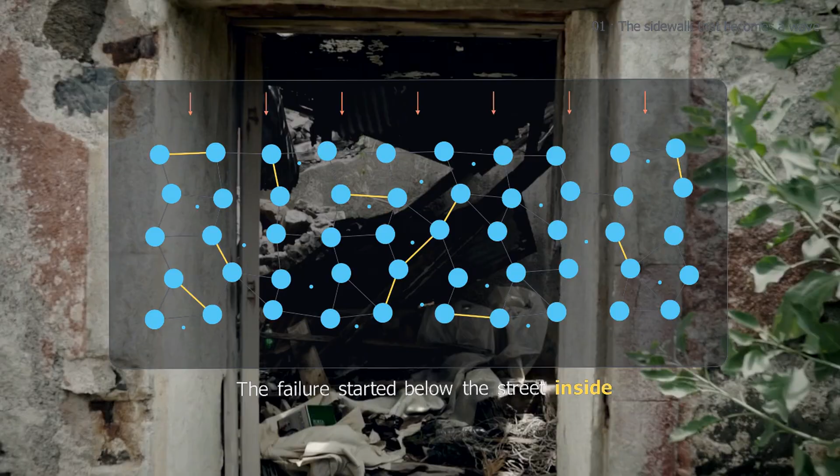The failure started below the street, in a space too small to see. Every grain of sand was carrying part of the city through a web of contacts. Then the earthquake made that web loosen, while trapped water took more and more of the load. The surface only revealed the transfer after it was already underway.

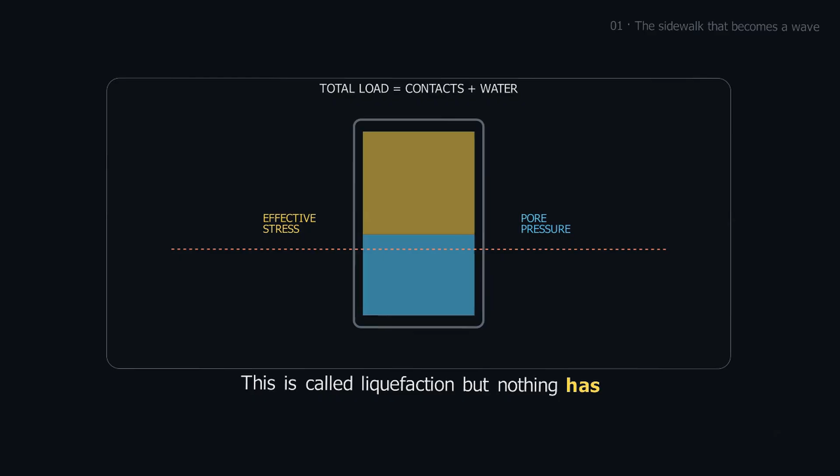This is called liquefaction, but nothing has melted. The grains remain solid. The water remains water. What changes is the structure that lets a pile of grains resist shear.

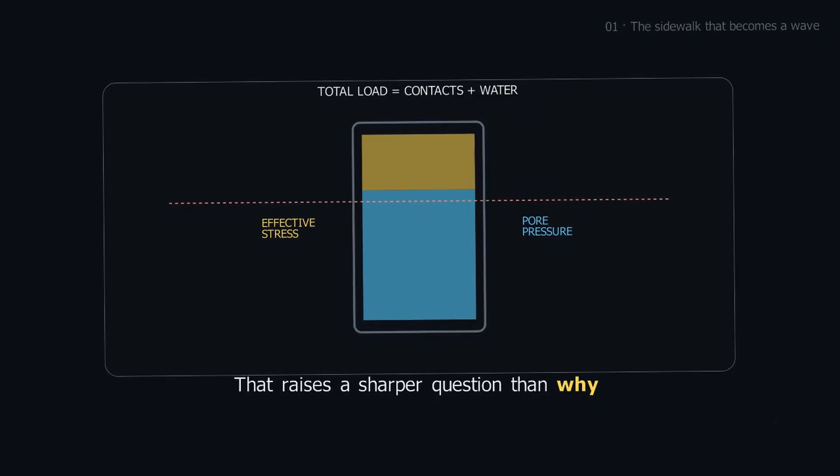For a short interval, a material that held buildings like a solid can deform with the ease of a dense fluid. That raises a sharper question than why did the ground shake? Most ground shakes during an earthquake without turning into this. Why do some blocks settle, crack and slide while nearby ground remains firm?

The answer is not one magic earthquake magnitude. It is a match between sediment, water, drainage, and repeated strain. We are going to build that match from the grain scale upward. We will watch the hidden pressure climb, cross the threshold where contact forces collapse, and then fan out into sand boils, tilted buildings, broken pipes, and lateral spreading.

The damage looks chaotic. The mechanism has a sequence. Once that sequence is visible, filled lagoons, old channels, deltas, and reclaimed shorelines become stored arrangements of grains and water.

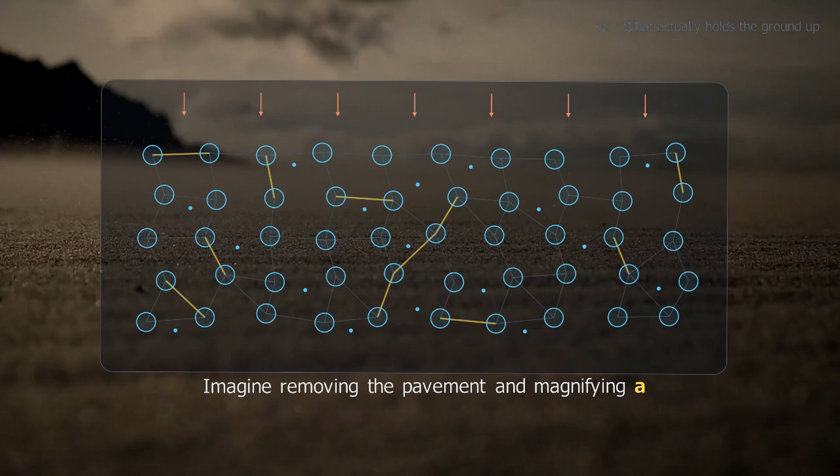Imagine removing the pavement and magnifying a small block of soil. It is not a continuous slab. It is a crowd of grains touching at points and edges. The weight above passes through branching chains of contact, grain into grain, down through the layer, and eventually into stronger material below. Between those grains are voids.

If the water table is low, some voids contain air. Below the water table, the voids can be filled with water. That water already has pressure, but under ordinary conditions the mineral skeleton still carries enough of the total load for the soil to resist distortion.

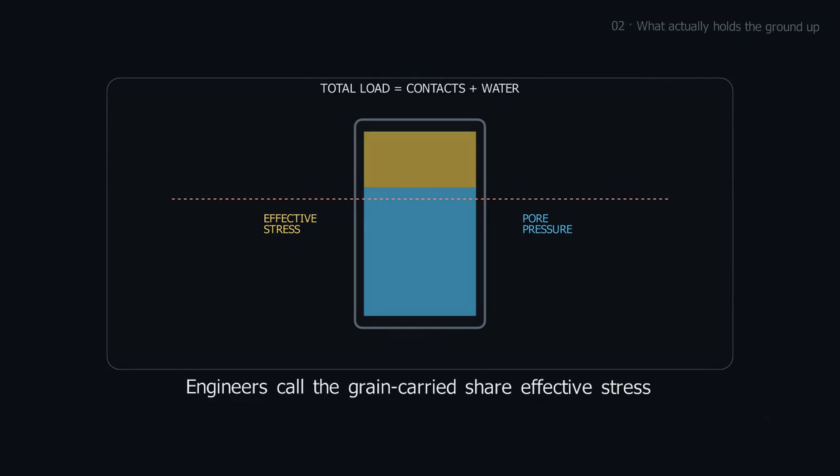Engineers call the grain-carried share effective stress. Total stress comes from everything above. Subtract pore water pressure, and the remainder presses grain contacts together and controls much of the soil's strength.

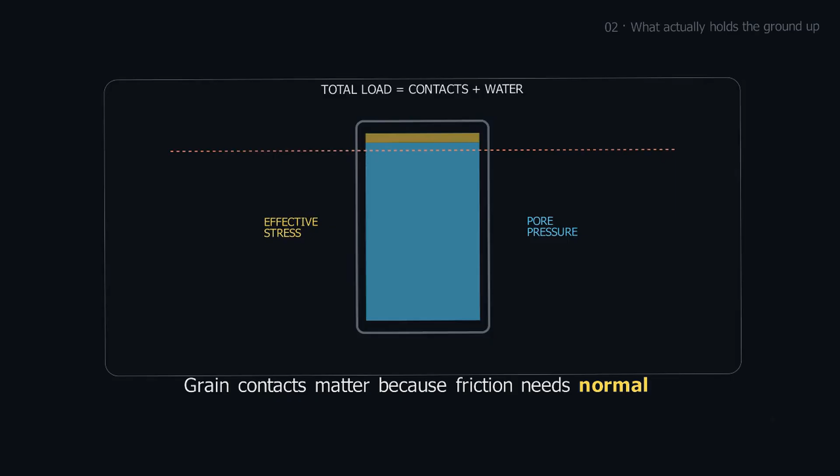Grain contacts matter because friction needs normal force. Push two rough surfaces together, and they resist sliding. Reduce the force squeezing them, and the same surfaces slip more easily. A sand layer can therefore lose shear resistance without crushing grains or heating them. It only needs the contact forces to shrink far enough.

Uneven force chains bridge loads around voids. Repeated rearrangement changes those chains, and trapped water inherits more of their load.

So solid ground is not a substance label. It is a working arrangement: grains locked by contact force, pores holding fluid, and drainage controlling how quickly pressure can escape. Earthquake shaking attacks the arrangement, not the chemistry. Liquefaction begins when the load path moves away from the grain skeleton and into the pore water.

The first screen has three parts: susceptible loose sediment, connected water-filled pores, and cyclic loading strong and long enough to build excess pressure. Remove one part and the response changes.

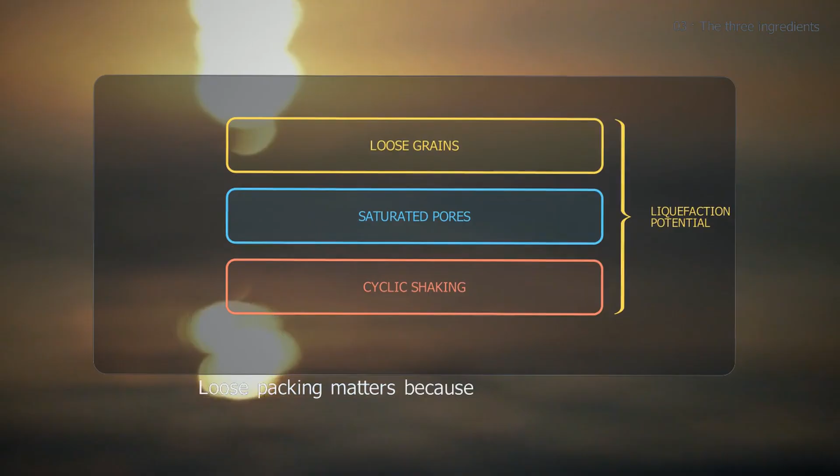Loose packing matters because loose grains have room to find a denser arrangement. Shake a dry jar of sand, and the surface settles as grains fit together more efficiently. Underground, saturated sand tries to do something similar during repeated shear. The difference is that the pore water may not have time to move out of the shrinking void space.

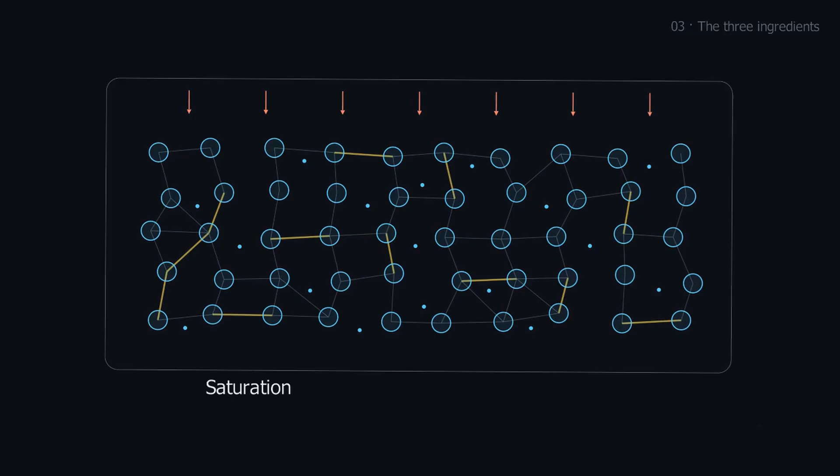Saturation supplies the pressure pathway. In dry sand, air compresses and escapes relatively easily. Water is far less compressible.

If a saturated layer is capped by lower permeability material, or if drainage paths are simply too long for the shaking interval, the attempted volume change is converted into a rapid rise in pore water pressure.

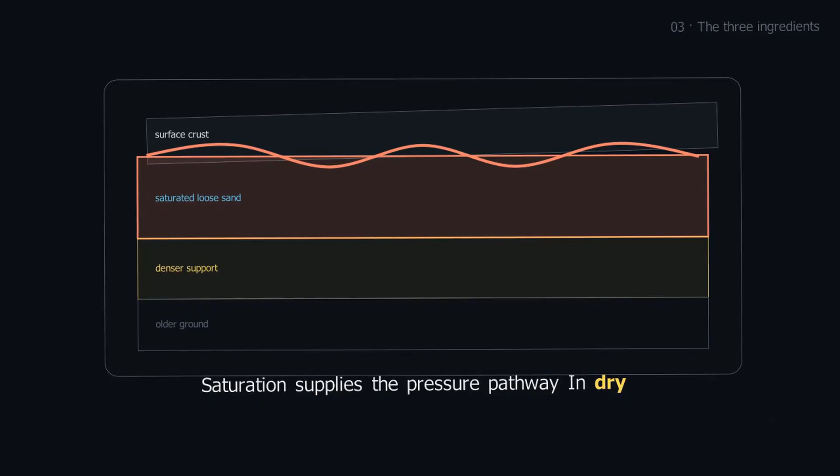Shaking supplies repeated shear cycles. One reversal nudges the fabric. The next reversal nudges it again.

Stronger motion increases the cyclic stress, while longer motion can add more damaging cycles. That is why earthquake magnitude, distance, local wave amplification, and duration all matter, but none works as a single on-off switch by itself.

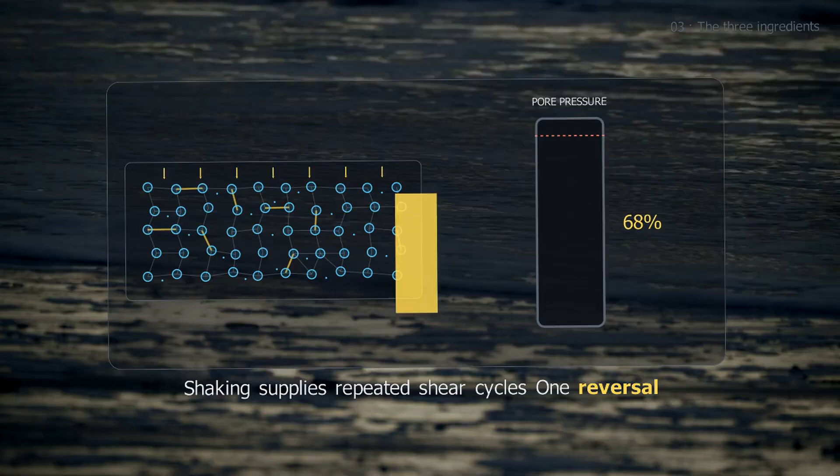Young river deposits, deltas, beaches, floodplains, and fills often combine loose sediment with shallow groundwater. Rock and clay-rich ground are different systems. This is why hazard follows buried geography.

A modern street grid can cross an old tidal inlet without showing it. Houses may sit on fill placed over a former marsh.

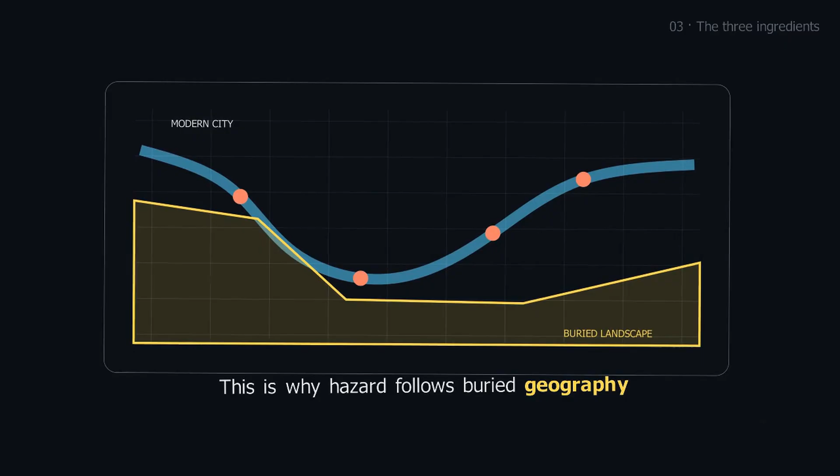Two neighborhoods equally distant from a fault can have very different liquefaction susceptibility because one is founded on dense natural ground and the other on loose saturated fill.

Start the shaking. The soil layer shears one way, then the other. Grains roll, slide, and try to reorganize. In a loose packing, their preferred rearrangement is contractive. The skeleton wants to occupy slightly less volume.

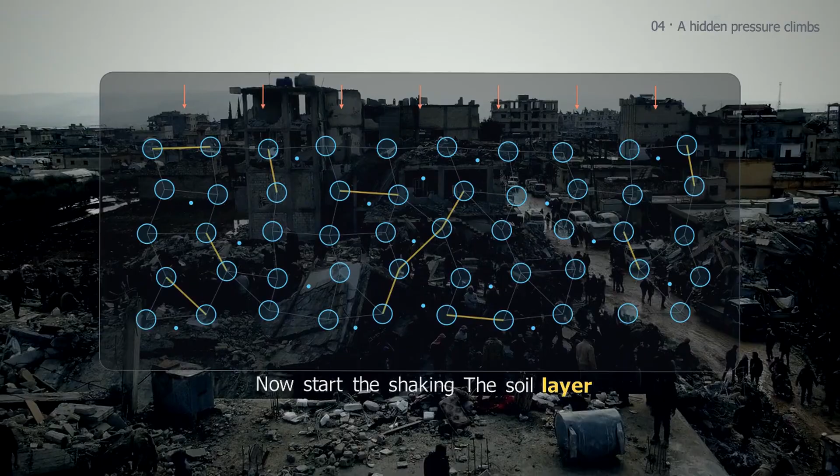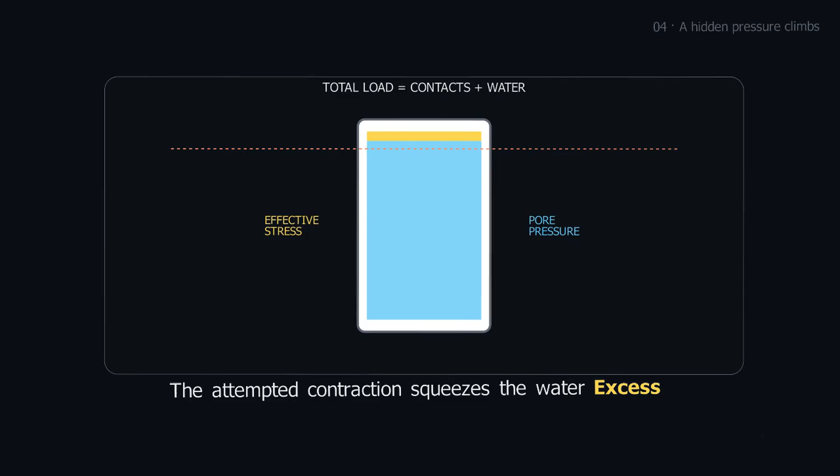But the earthquake is cycling faster than the pore water can drain away. The attempted contraction squeezes the water. Excess pore pressure rises. Because total overburden load changes little over a few shaking cycles, every increase in pore pressure is a decrease in effective stress. The grains are not suddenly lighter, they are simply carrying less of the load through solid contact.

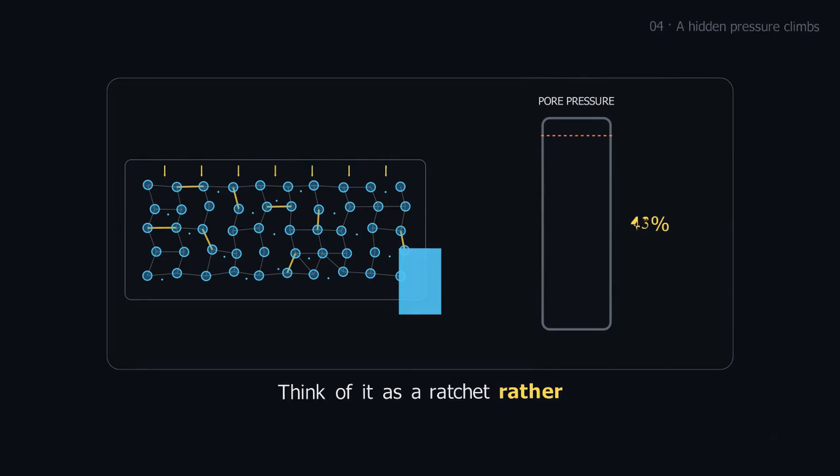Think of it as a ratchet, rather than a single blow. A cycle disturbs the network and adds pressure. Partial rearrangement occurs. Another cycle arrives before drainage can reset the system. Depending on density and loading, pressure accumulates toward the effective overburden stress.

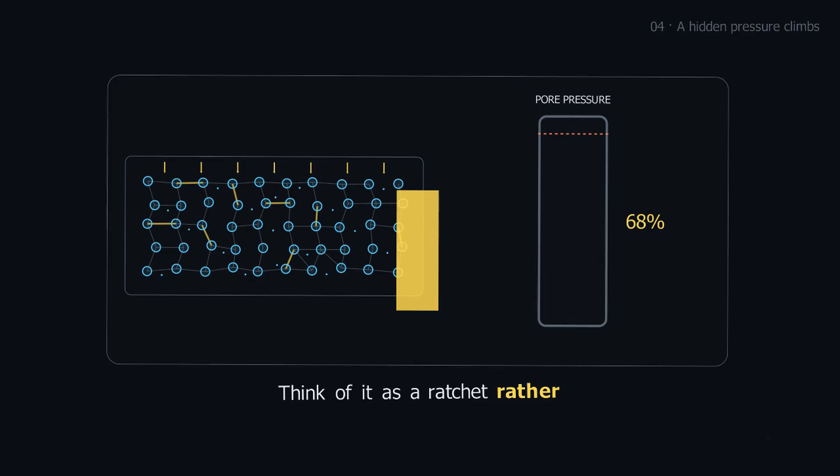The important quantity is the competition between generation and dissipation. Short, permeable drainage paths can limit pressure. Layer thickness, boundaries, density, and shaking still decide whether generation outruns dissipation. The danger is a pore pressure curve chasing the total stress ceiling.

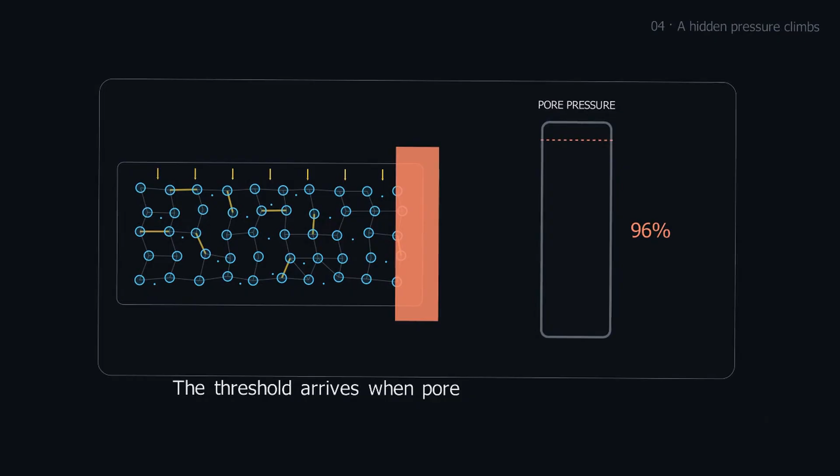Near that ceiling, contact forces shrink and shear resistance collapses. The graph is the grain skeleton unloading in real time. The threshold arrives when pore pressure approaches the confining stress that had been holding the grains together. Effective stress approaches zero, at least transiently and locally.

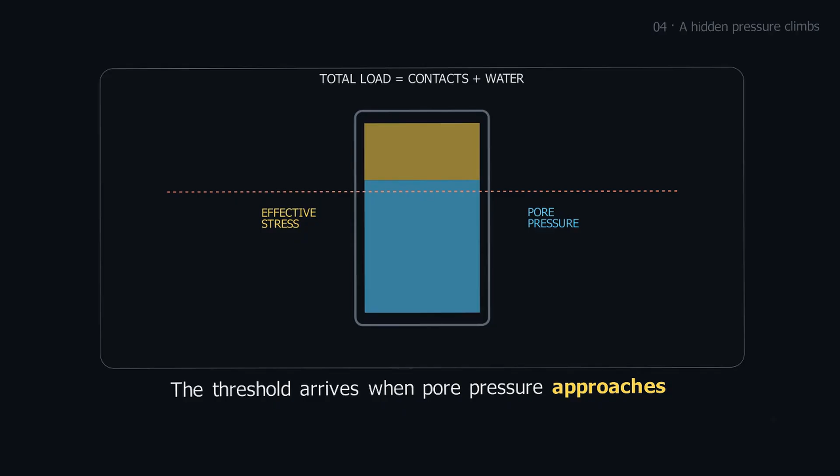That condition is often called initial liquefaction. What happens next depends on density, drainage, layering, slope, and the loads above. Triggering is the start of the consequence, not its complete description.

Total stress equals effective stress plus pore pressure. During rapid undrained shaking, pore pressure grows inside a nearly fixed total. Effective stress is the shrinking remainder that stabilizes the grain fabric. Near zero effective stress, frictional strength drops sharply.

A foundation can punch downward. A buried pipe can rise because its buoyancy now matters more than the weakened soil around it. A surface crust can slide over the softened layer. The same hidden threshold therefore produces different visible failures depending on geometry and infrastructure.

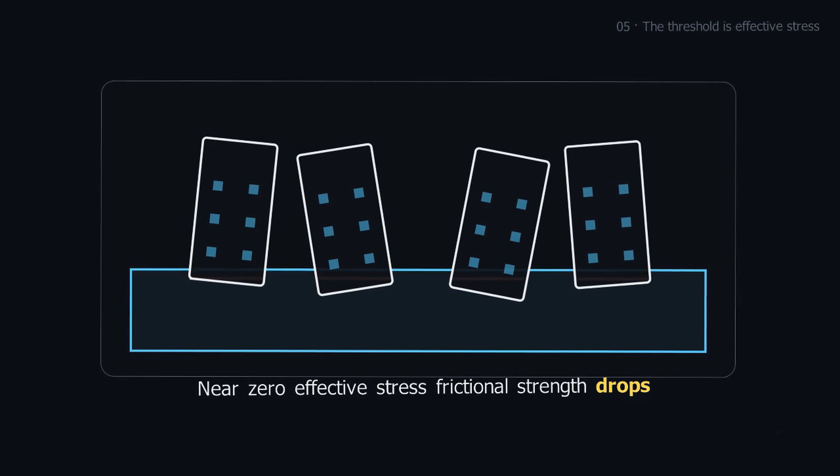But real soil does not become a featureless liquid. Denser sand may try to dilate, or expand, once it is sheared far enough. That tendency can reduce pore pressure, and restore contact force during deformation. Looser contractive material can suffer larger strength loss. This is one reason the ground turn to water is memorable but scientifically incomplete.

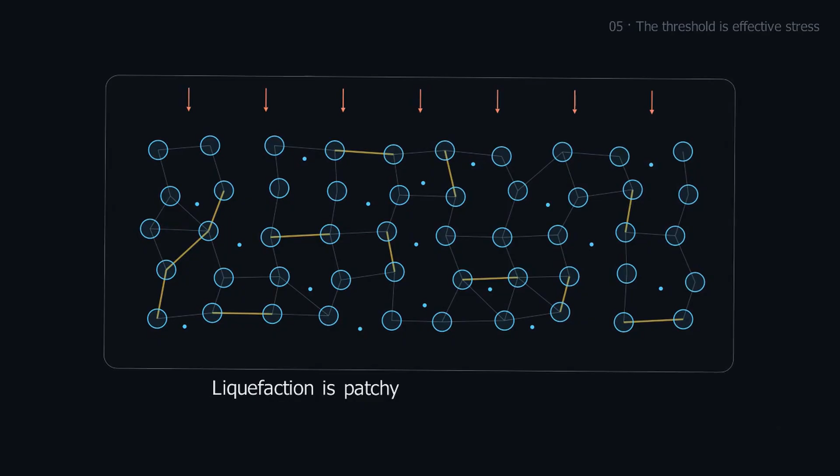Liquefaction is patchy. Thin layers may trigger beside strong layers, while a foundation responds to the integrated behavior beneath its whole footprint. When shaking stops, pressure begins to dissipate through drainage.

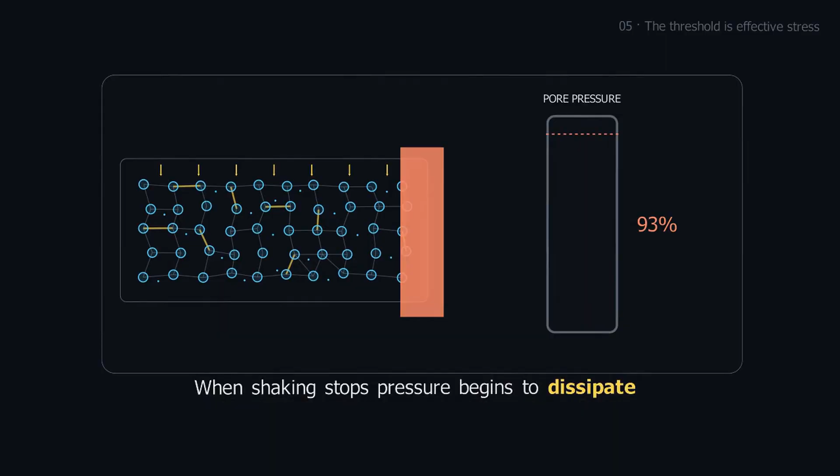Effective stress returns as water escapes and grains settle into a denser arrangement. The soil may regain strength, but the geometry does not rewind. Settlement, tilting, cracks, displaced utilities, and shifted ground remain as the permanent record of a temporary loss of support.

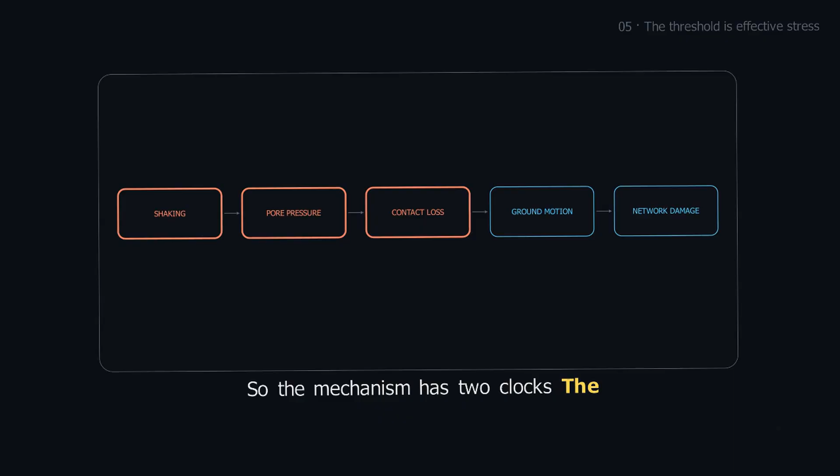So the mechanism has two clocks. The fast clock is seconds of cyclic loading and pressure rise. The slow clock is drainage, consolidation, and repair. A threshold crossed for only moments can reorganize a city block for years. The decisive variable was not how liquid the soil looked, but how completely the grain network surrendered its load.

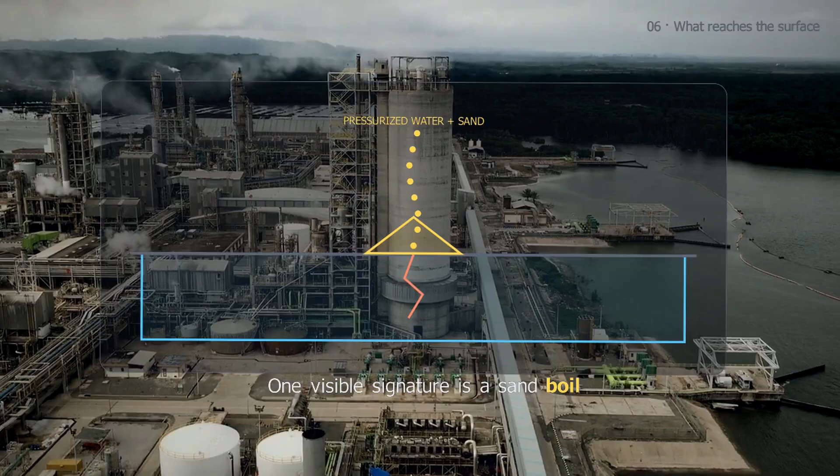One visible signature is a sand boil. Pressurized water finds a crack or weak path through the surface cap and carries sand upward. The eruption can leave a small cone or sheet of pale sediment around a vent. It is a plumbing connection between a liquefied layer below and the air above.

Pressurized sand can inject through fractures as buried dikes and sills. The surface cone is only the outlet of that three-dimensional network.

Settlement is another outcome. As excess pressure dissipates, grains move into a denser packing and the layer loses volume. If that compression is uneven, one side of a building or road can sink more than the other. Differential settlement is especially damaging because structures tolerate uniform movement better than distortion.

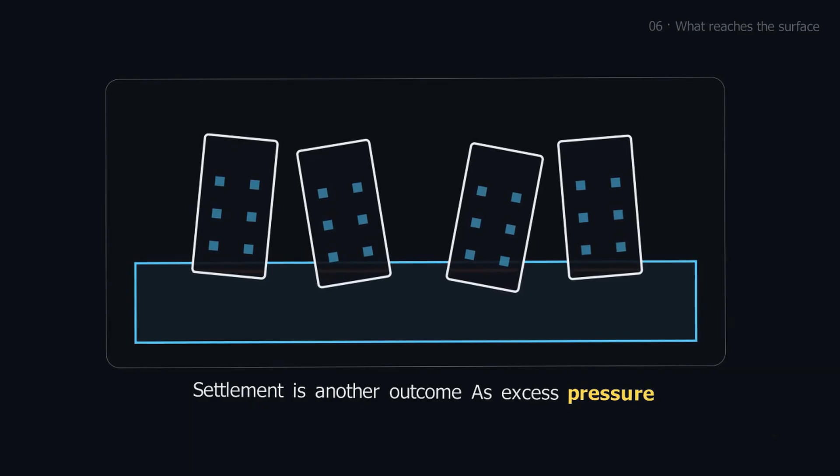At the same time, buried objects can move upward. A lightweight tank, manhole, or pipe that was held in place by strong soil may become buoyant relative to the weakened saturated mixture. The image seems paradoxical. Heavy buildings descend while hollow infrastructure rises. Both motions follow from the same loss of effective confinement.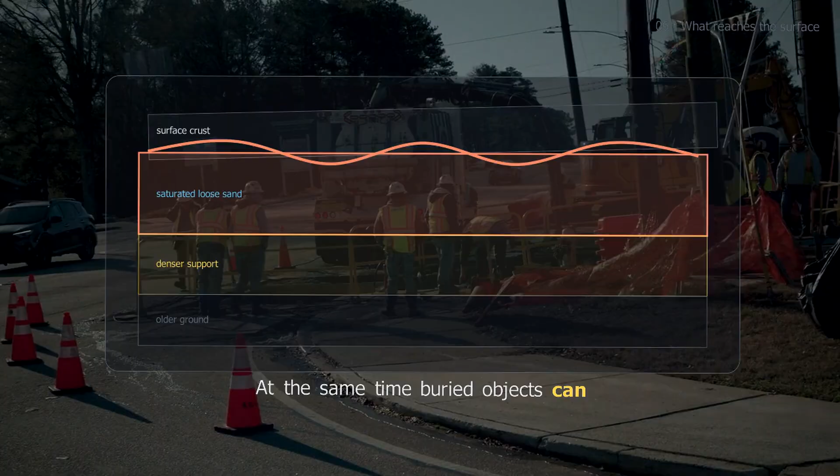A stiffer surface crust can remain partly intact while the layer beneath weakens. The crust then breaks into rafts, tilts, or spreads apart. Cracks at the surface do not necessarily trace the shape of the liquefied layer directly. They show how the overlying ground accommodated movement after its support changed. These signs are not a universal checklist.

Investigators combined observations with borings, penetration tests, groundwater, and shaking records to distinguish liquefaction from lookalikes.

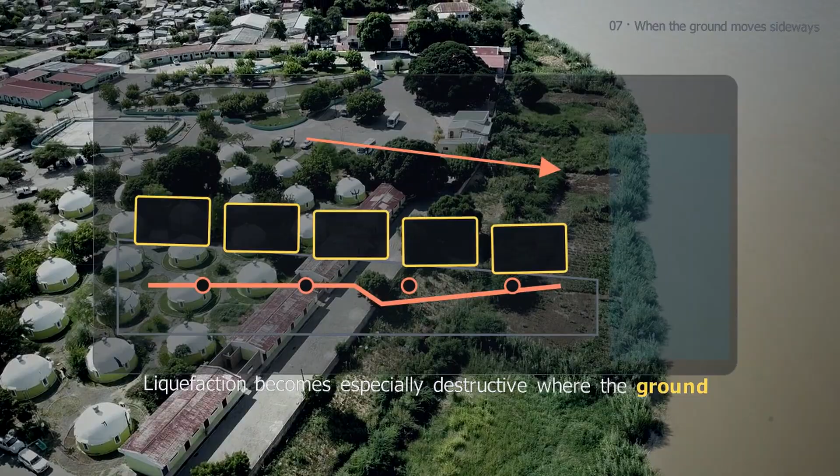Liquefaction becomes especially destructive where the ground has somewhere to go. Beside a riverbank, harbor wall, canal, or bluff, the soil faces a free edge. A gently sloping surface also provides a downhill direction. Once a buried layer loses strength, the overlying crust can move laterally toward that opening.

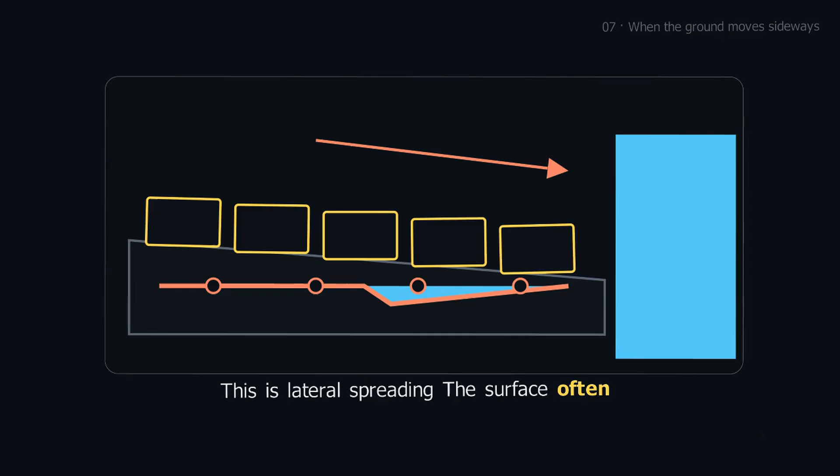This is lateral spreading. The surface often breaks into coherent blocks separated by fissures. Each block may translate and rotate while riding over or deforming the weakened layer. Movement can be less than a meter, or reach several meters, enough to tear foundations apart even when the buildings themselves were designed to resist shaking.

Lifelines are vulnerable because they cross the moving ground. Water, gas, sewer, power, rail, and road networks cannot simply follow each block. Joints pull apart, piles bend, bridge approaches settle, and quay walls move toward the water. A modest displacement distributed across a neighborhood can create a large systems failure.

In 1906 San Francisco, lateral spread damage to water mains hindered firefighting. Secondary ground movement attacked the network needed for response.

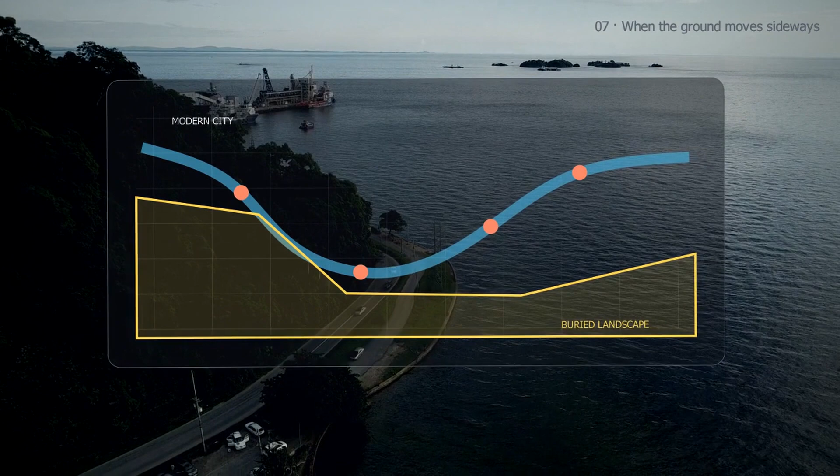Flow failures are a more extreme branch. Under suitable loose material and slope conditions, liquefied soil or intact blocks riding on it can move far and fast. But not every liquefied site becomes a flow slide. Geometry, residual strength, drainage, and confinement decide whether deformation is arrested or runs away.

The sequence now exceeds a soil column: shaking, pressure, weakness, displacement, utility breaks, and amplified emergency. Local physics creates non-local consequences through connected systems.

On June 16, 1964, a magnitude 7.5 earthquake struck near Niigata, Japan. The city stood on young deltaic and coastal sediments with shallow groundwater. Strong shaking triggered widespread liquefaction. The photographs that became iconic show apartment buildings leaning at extraordinary angles, while much of their reinforced concrete superstructure remained recognizable. Those buildings did not need to shatter to fail.

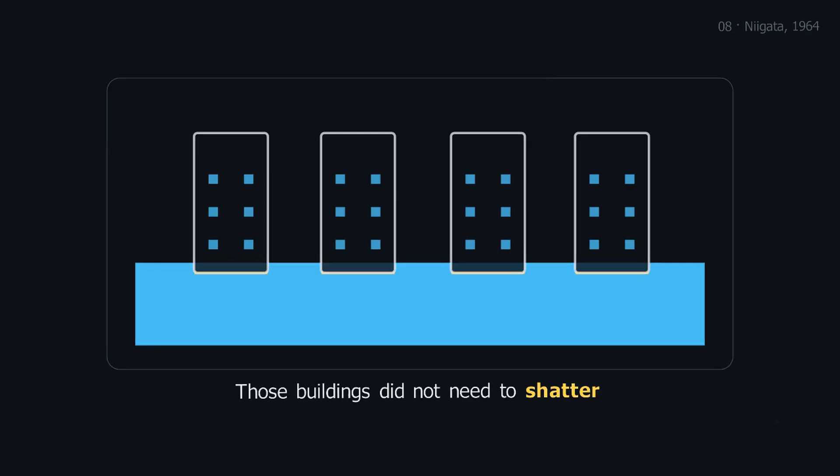The soil beneath their shallow foundations lost bearing resistance and deformed unevenly. Some structures settled and rotated as intact units. The visual result looks as if a rigid model building was placed on a soft surface, because at the foundation scale that is close to what happened.

The important geometry was a susceptible saturated layer extending from near the surface to a depth comparable with the building width. The foundation load needed a strong soil volume beneath it. When effective stress collapsed through enough of that volume, the load path spread, settlements grew, and rotation followed small differences from one side to the other.

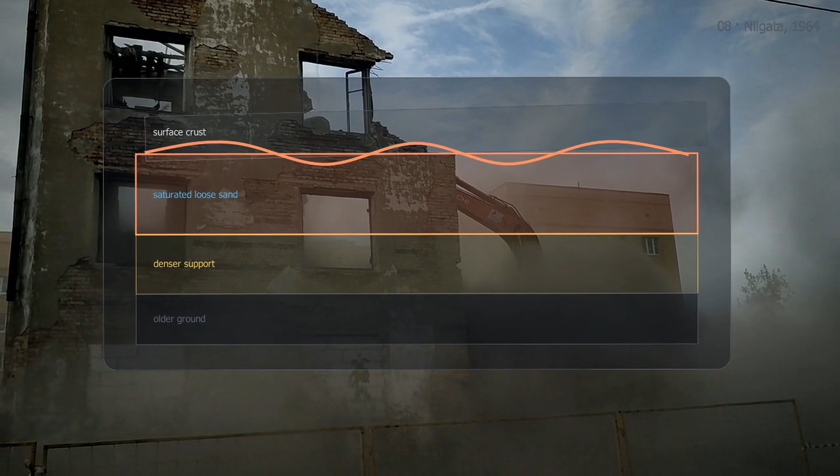Niigata also damaged bridges, roads, buried structures, and ports. Each asset sampled a different depth and failure mode in the disturbed ground.

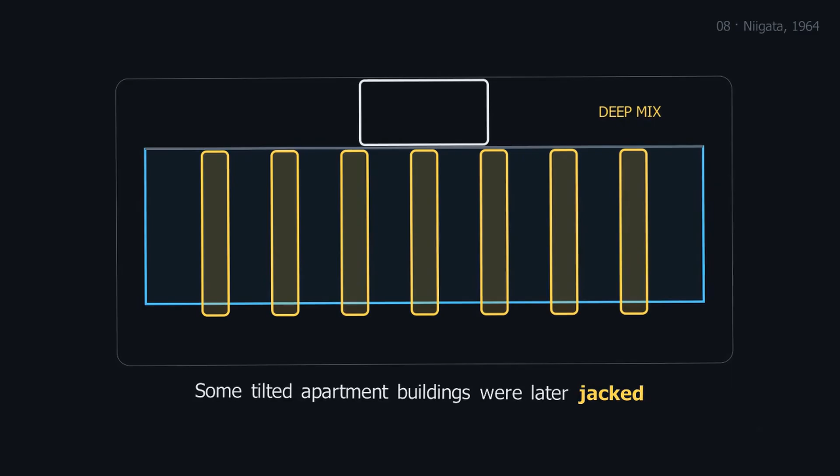Some tilted apartment buildings were later jacked upright, underpinned with piles, and reused. That fact is almost as revealing as the failure. The concrete frame had not transformed into liquid. The support conditions had changed. Repair worked by creating a new load path to material able to carry the structure reliably.

Niigata made an invisible threshold visible. Its lesson is specific: young saturated sediment, shaking history, and foundation geometry can make the ground fail before the building frame.

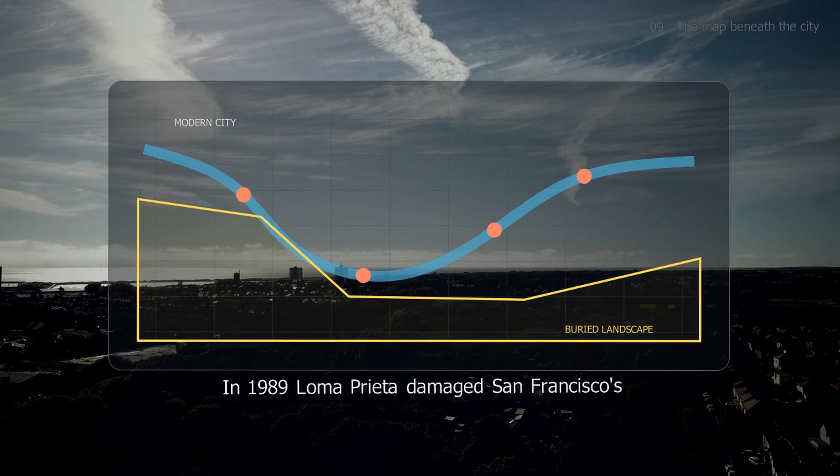In 1989, Loma Prieta damaged San Francisco's Marina District, including fill over former lagoon and shoreline environments. USGS found liquefaction and amplified shaking. Buried land history explained what the street map could not.

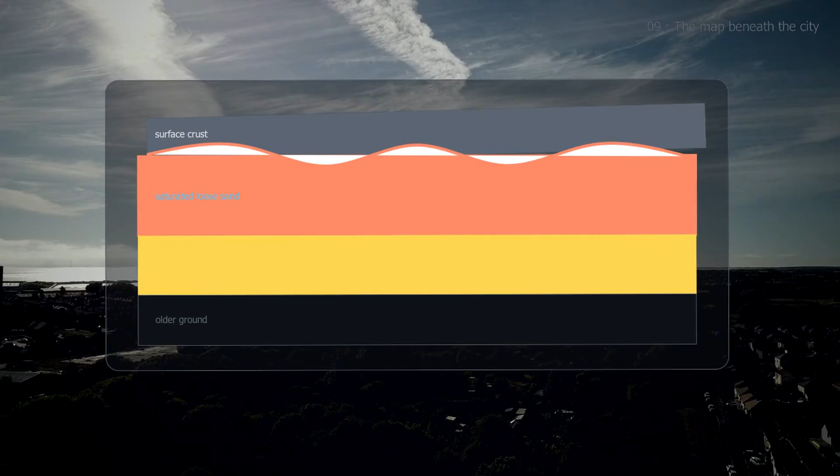Fill is not automatically dangerous. Placement, compaction, age, and groundwater matter. Loose saturated fill can still assemble all three ingredients.

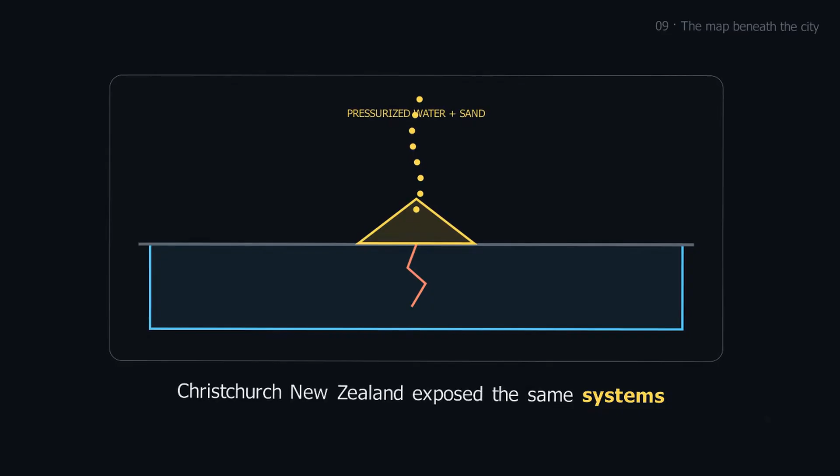Christchurch, New Zealand, exposed the same systems problem at city scale in 2010 and 2011. Repeated earthquakes triggered widespread liquefaction in susceptible alluvial deposits. Streets filled with ejected sediment, foundations settled, and buried infrastructure failed. Multiple events also showed that prior shaking can alter ground conditions and complicate recovery.

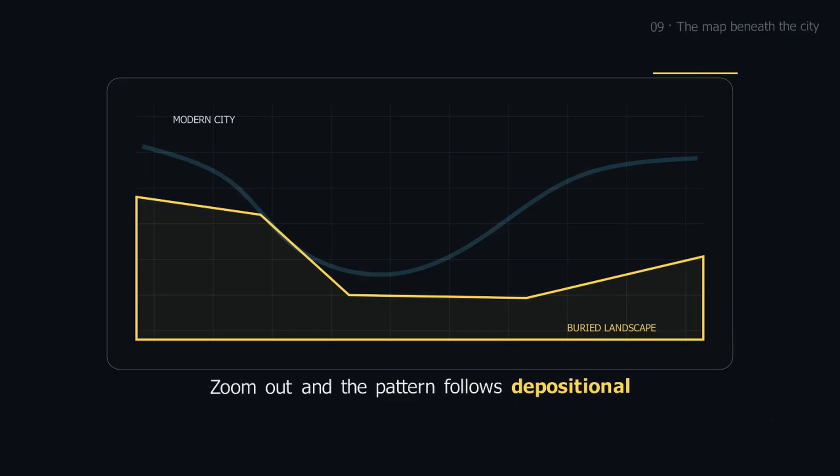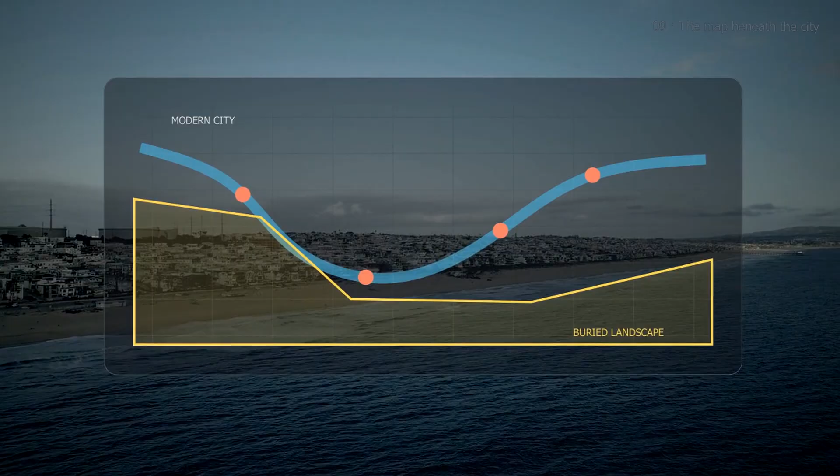Zoom out and the pattern follows depositional systems: abandoned river channels, point bars, flood basins, deltas, beaches, estuaries, and reclaimed edges. Zoom in and the pattern becomes layered and irregular. A regional map can identify likely zones, but site conditions can change abruptly over the width of a building.

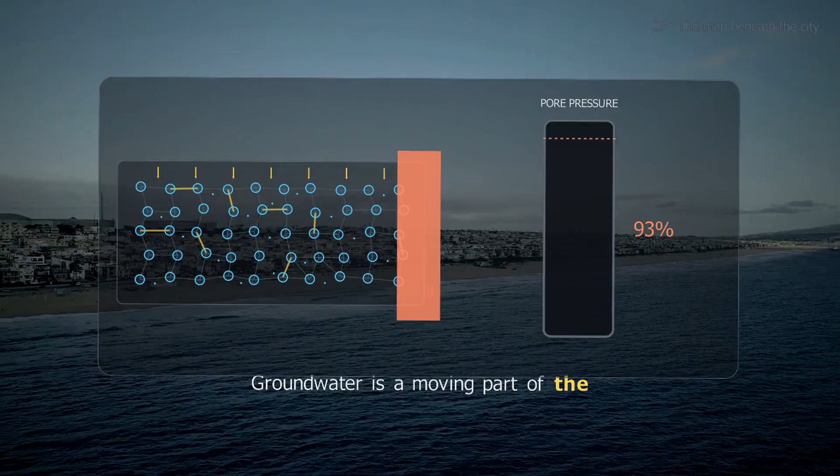Groundwater is a moving part of the map. Seasonal variation can raise or lower saturation. Pumping, drainage, land subsidence, and coastal water levels can change the hydraulic boundary. USGS scenario work around San Francisco Bay has examined how higher sea level could increase liquefaction intensity at some natural soil sites by raising groundwater.

The city therefore has two maps. One shows streets, parcels, and buildings. The other shows sediment age, buried channels, fill history, water table depth, and expected shaking. Liquefaction risk appears where those maps overlap with exposure. The hazard is not hidden because it is unknowable.

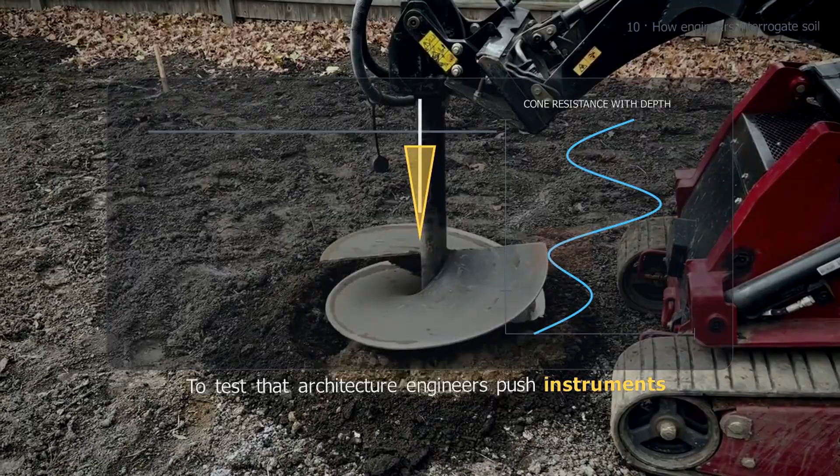It is hidden because the decisive architecture is underground. To test that architecture, engineers push instruments into the ground. A cone penetration test drives a standardized cone downward while measuring tip resistance and sleeve friction, often with pore pressure as well. The trace changes with depth, revealing stronger and weaker layers at a resolution that a surface photograph cannot provide.

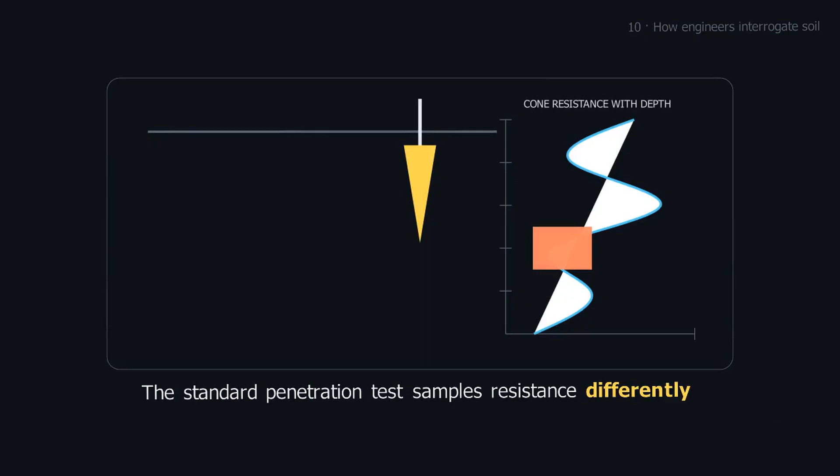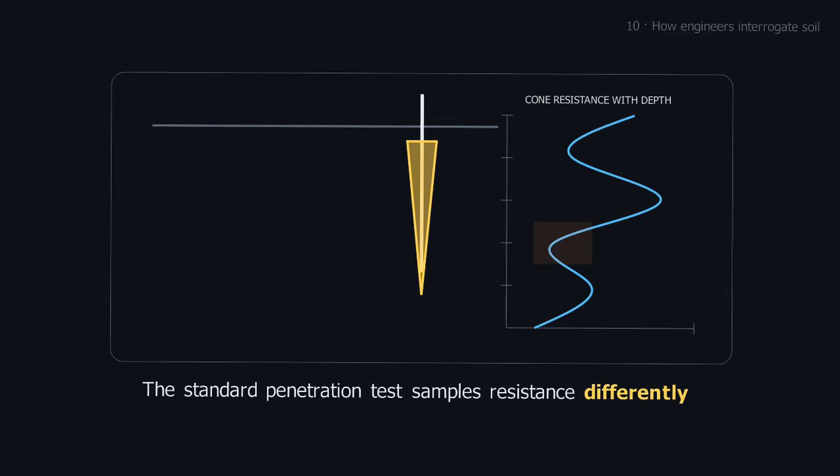The standard penetration test samples resistance differently by counting hammer blows needed to drive a sampler. Shear wave velocity offers another view of stiffness. Borings recover material for classification. Groundwater measurements define saturation and hydraulic conditions. No single test is the soil's complete identity. The site model comes from combining them.

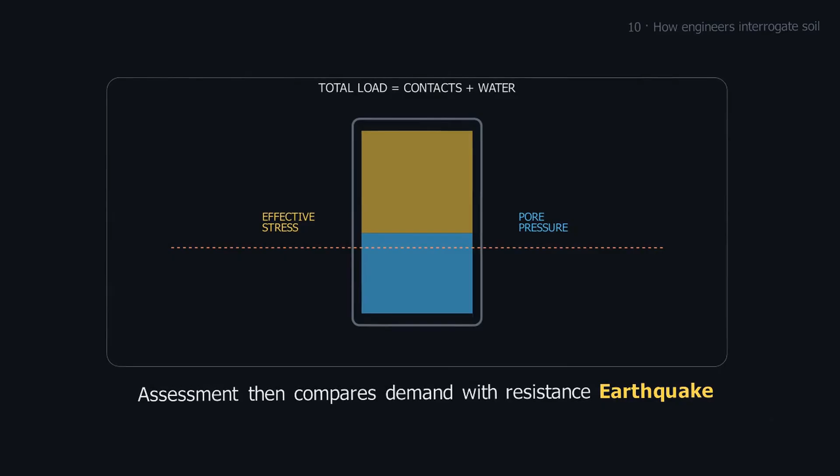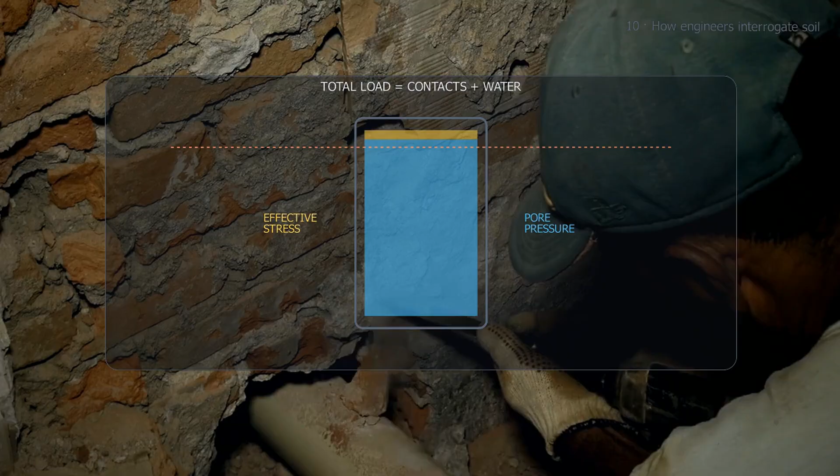Assessment then compares demand with resistance. Earthquake ground motion estimates provide cyclic stress demand. Field correlations built from sites that did and did not liquefy provide empirical resistance. A factor of safety or probability expresses the comparison. The calculation is powerful precisely because it carries uncertainty rather than pretending every layer has a deterministic switch.

Case histories are the method's memory. Each earthquake tests the boundary using field resistance, groundwater, soil type, shaking, failures, and surviving sites.

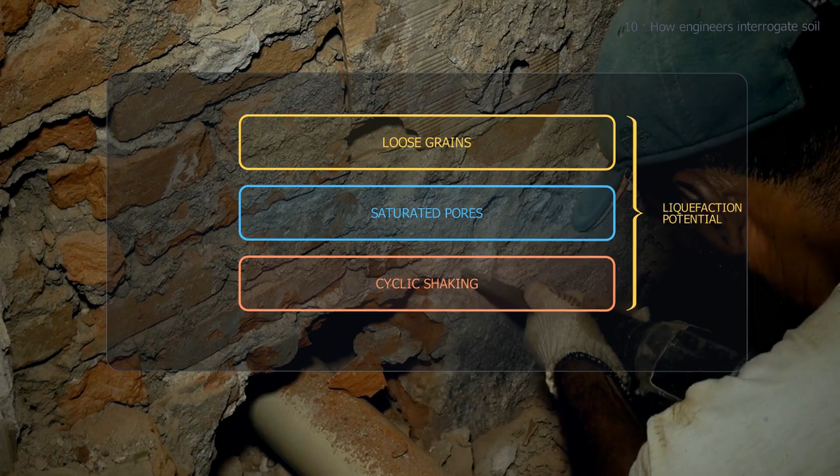Regional models work at another scale. USGS ground failure products combine ShakeMap motion with proxies for susceptibility to estimate where liquefaction effects are likely after significant earthquakes. These products guide awareness and response. They do not replace borings, field reconnaissance, or site-specific engineering design.

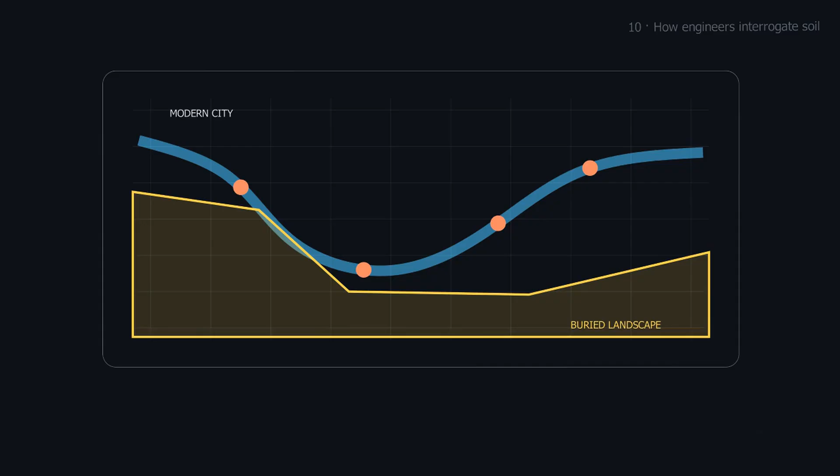The workflow moves from map to mechanism, zone, layers, groundwater, shaking demand, pressure ratio, and structural deformation. The result is a forecast tied to a structure and scenario, not abstract safe ground.

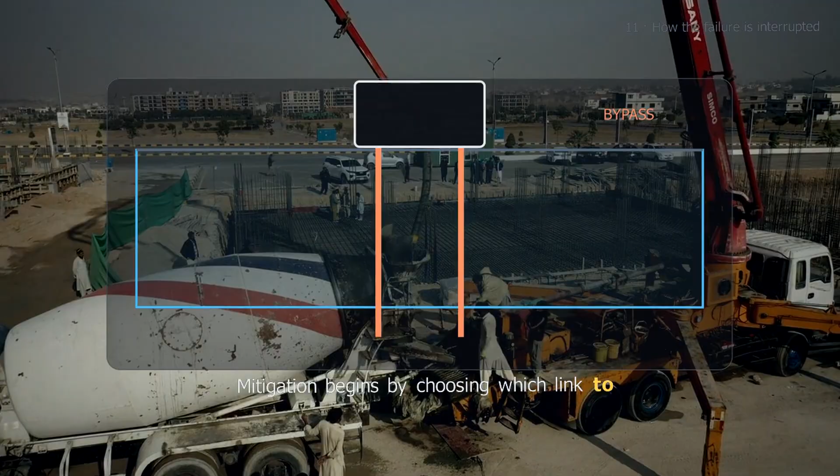Mitigation begins by choosing which link to change. Increase soil density so the grains are less contractive. Give pore water shorter drainage paths. Cement or mix the soil into a stronger mass. Carry structural loads through the susceptible layer with deep foundations. Reduce the load, relocate the asset, or design utilities to tolerate displacement.

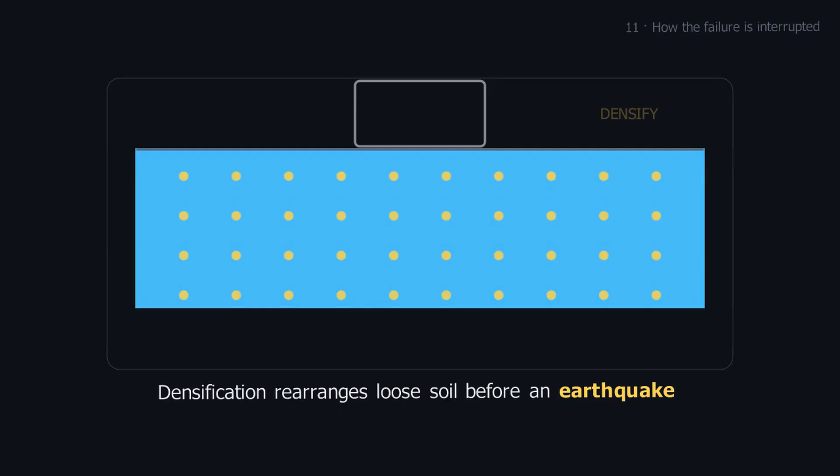Densification rearranges loose soil before an earthquake, creating a tighter buried fabric that generates less damaging pressure and deformation under cyclic loading. Drainage methods add permeable paths that let pressure dissipate.

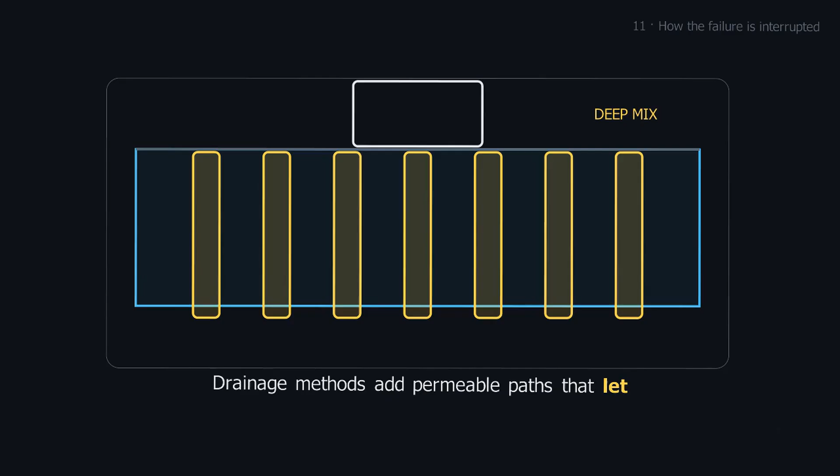Stone columns can combine drainage with reinforcement and densification, depending on design. Their value is a race against the shaking clock. If excess water pressure can escape fast enough, effective stress does not fall as far or remain low as long.

Deep mixing takes a different approach. Soil is blended with cementitious binder to form columns or grids. FHWA guidance describes lattice arrangements that contain liquefiable soil and increase mass shear strength. Instead of asking loose grains to carry the same load more effectively, the treatment builds a new structural skeleton through the ground.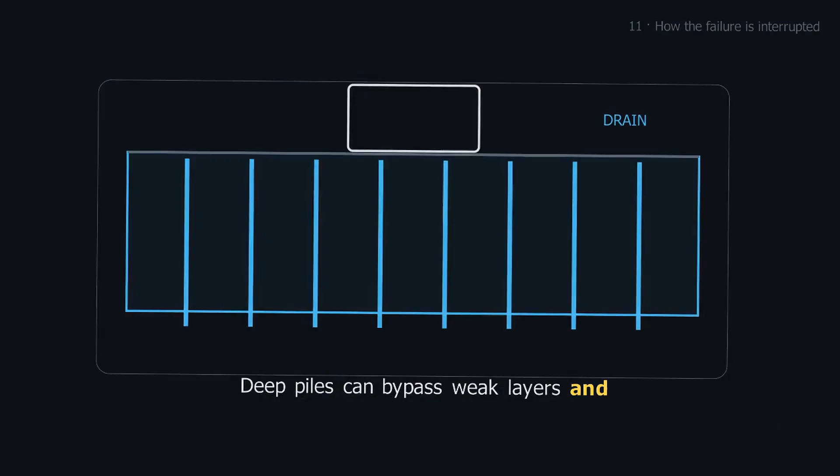Deep piles can bypass weak layers and transfer building loads to stronger material, but the design still has to consider lateral spreading, downdrag from settlement, bending demands, and the behavior of pile caps and utilities. Saving the vertical load path does not automatically protect every connection crossing the moving ground.

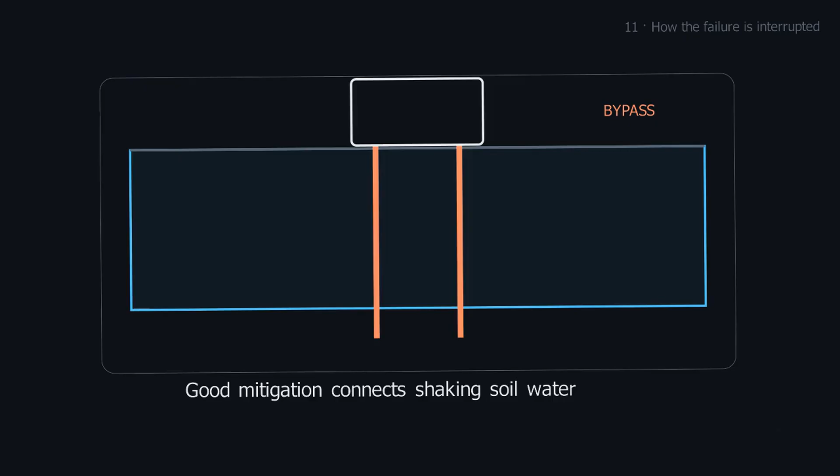Good mitigation connects shaking, soil, water, failure mode, structure, and acceptable consequence. It succeeds by breaking the specific chain that would turn a pressure threshold into unacceptable loss.

Start again at the grain scale. Loose particles sit in a saturated layer. The earthquake applies repeated shear. The skeleton tries to contract faster than water can drain. Pore pressure rises. Effective stress falls. Contact forces weaken. From that one transfer, the possible outcomes branch into settlement, uplift, bearing failure, sand boils, lateral spreading, and flow.

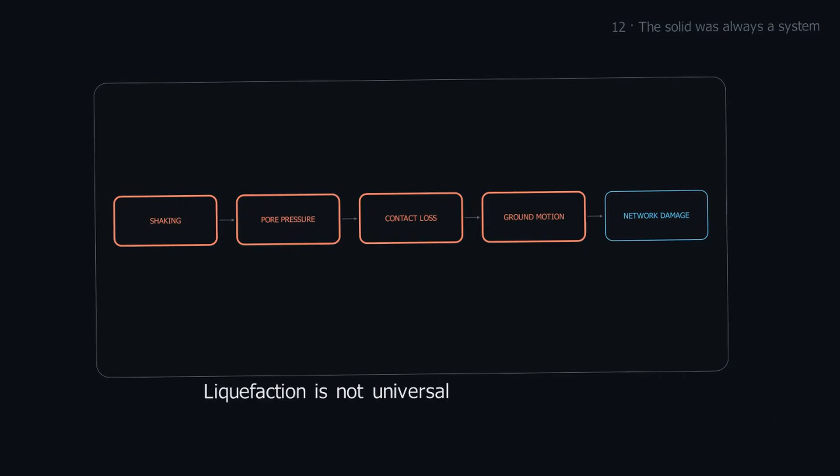Liquefaction is not universal. The right question is which susceptible layer, under which shaking and structural load, produces which branch of failure.

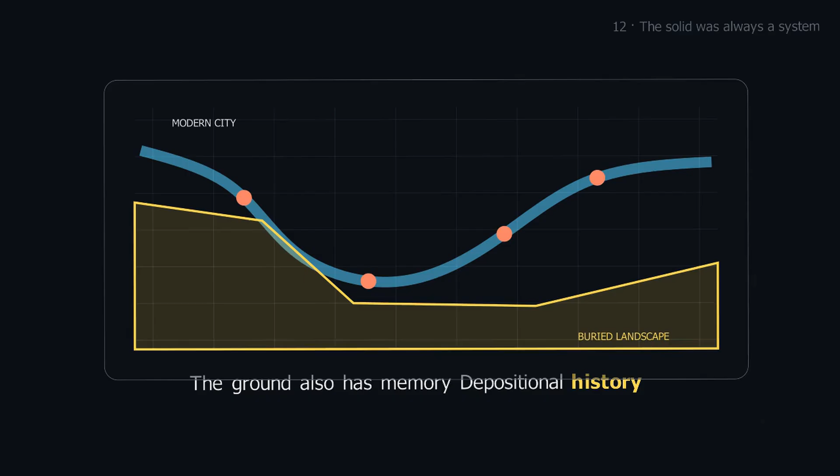The ground also has memory. Depositional history sets grain size and density. Old shorelines and channels set geometry. Construction adds fill and foundations. Groundwater moves. Earlier earthquakes densify some zones and damage others. Engineering treatment rewrites selected links.

What looks like a static parcel is a state assembled over time. That is why the most useful picture is not a building standing on blue liquid. It is a layered network. Fault motion becomes waves. Waves become cyclic stress. Stress changes pore pressure. Pressure changes contact force. Contact force changes deformation. Deformation crosses roads, pipes, foundations, and emergency systems.

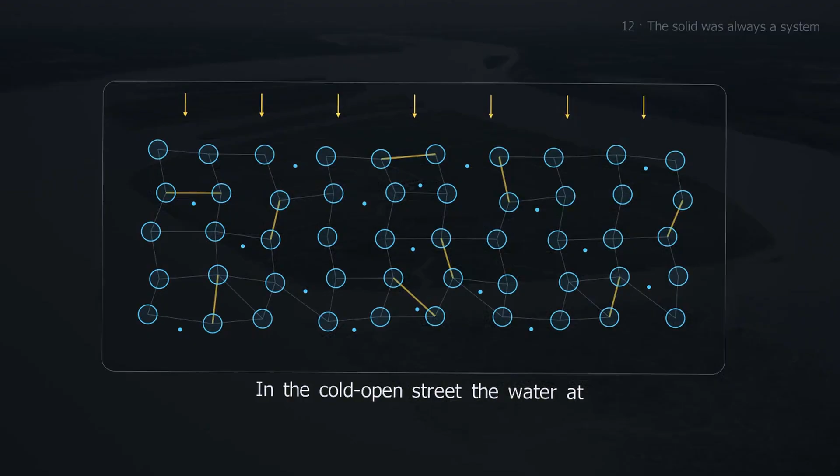In the cold open street, the water at the surface was the last messenger. The decisive event happened earlier, when a hidden grain network stopped carrying its usual share of the load. The sidewalk waved because the solid beneath it had always depended on moving water, fragile contacts, and enough time for pressure to escape.

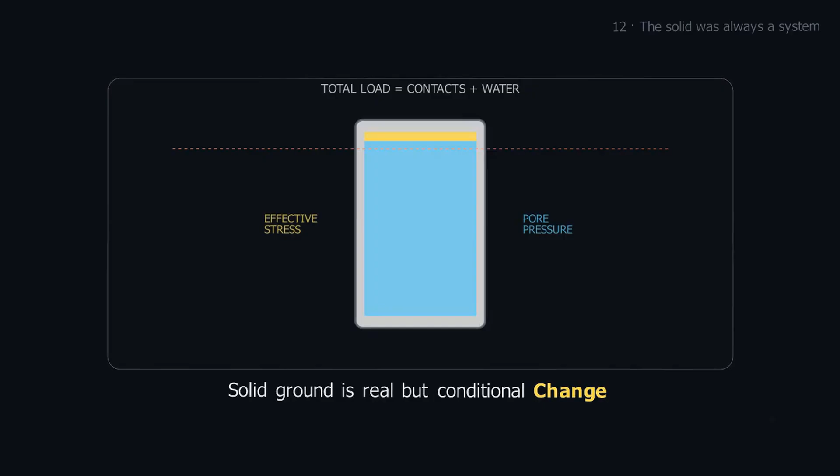Solid ground is real, but conditional. Change the conditions quickly, and the same grains behave differently. Liquefaction reveals that solidity is not an ingredient, it is a maintained state.